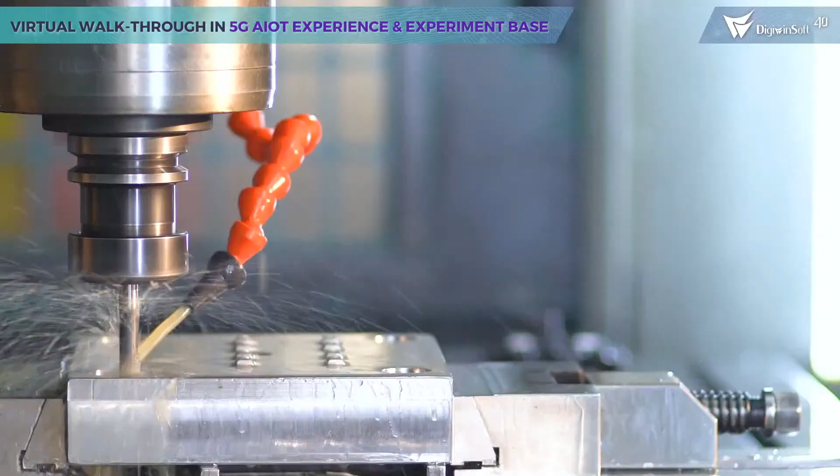The manufacturing process is long. Orders, materials, production, inventory to shipment—each stage is crucial and cannot be ignored. As a business owner, IT software can help you collect data in real time and accelerate the decision-making process.

However, we are facing a problem of being short-handed worldwide. Meanwhile, operation technology, OT, can help you with daily routine tasks to make good use of human resources. The staff can then spend their time on more complex work.

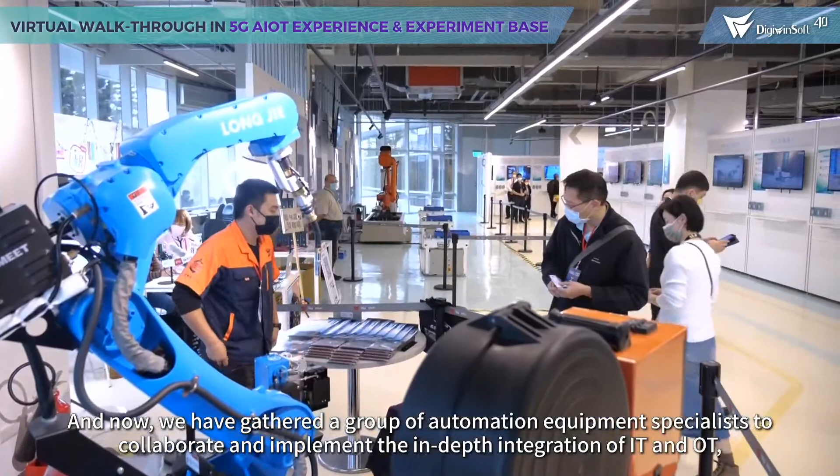Digiwin Software has extensive experience in manufacturing software for various industries, and now we have gathered a group of automation equipment specialists to collaborate and implement in-depth integration of IT and OT, and gradually achieve intellectualization.

The 4 key points to smart manufacturing are high on-site visibility, resilient scheduling, good OEE score, and effective logistics management. Meanwhile, IT plus OT can help you with all the above.

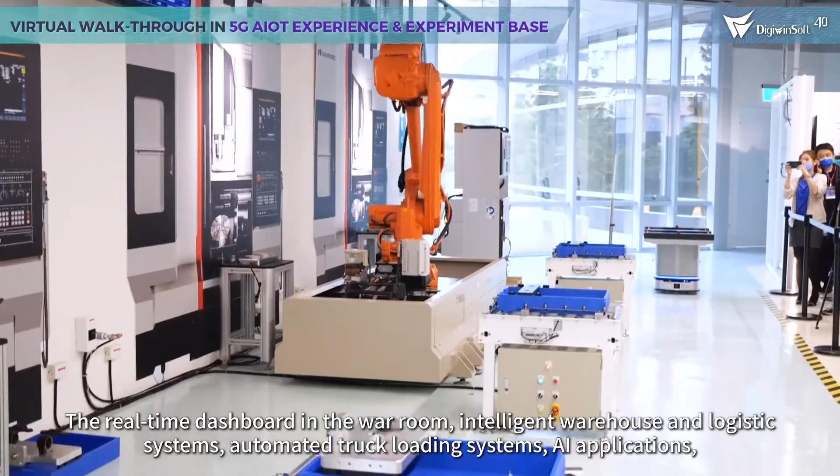Seeing is believing. The establishment of our 5G AIoT EEB allows manufacturers to witness the operation of automation and other technological equipment on site. The real-time dashboard in a war room, intelligent warehouse logistics system, automated truck loading system, AI applications, and up to 18 solutions for you to explore and experience.

Are you excited to have a look at our EEB? Let's cut to the chase.

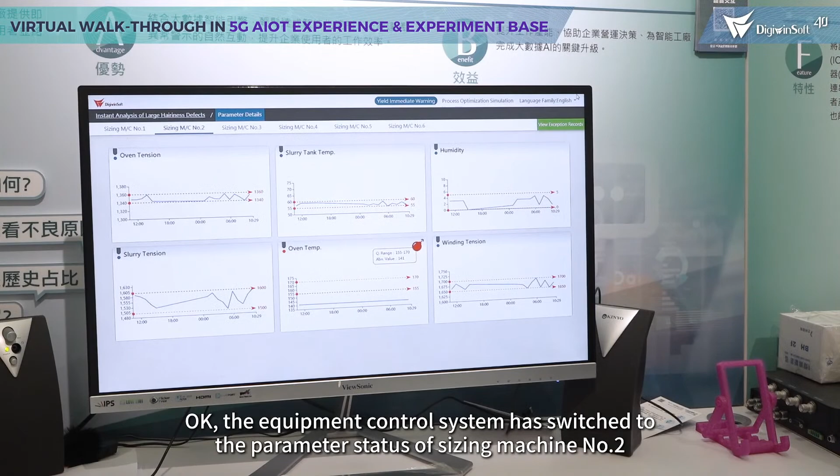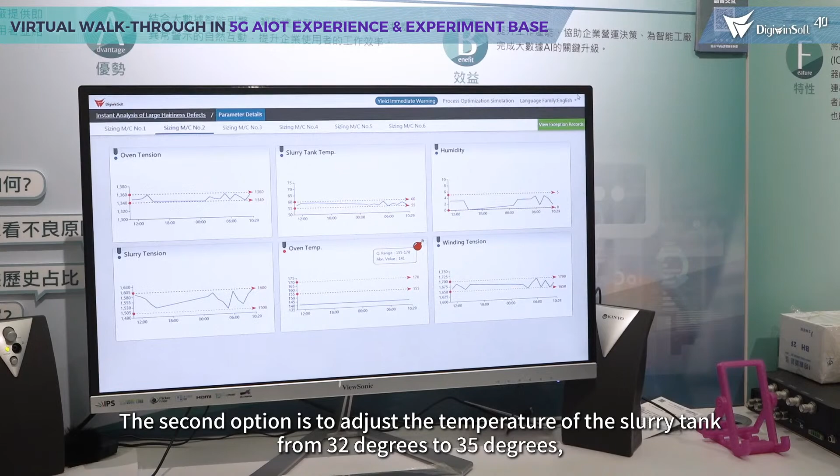Please give me follow-up advice. According to the historical data, 2 options are provided for you to optimize the operation. The first option is to adjust the oven temperature from 158 to 162 degrees. The second option is to adjust the temperature of the slurry tank from 32 to 35 degrees, and the yield rate is expected to improve.

Return to the main page. It has switched to the main page. Do you need any assistance? No thanks.

Wow, that's really convenient. It's just like an upgraded Siri specified for manufacturers. However, what if the digital employee just told me about an abnormal production? Can I request repair work remotely?

Sure, let me introduce another intelligent tool. I will show you the scene where a person needs assistance on the production side. He or she will get remote assistance through the AR HoloLens. For instance, in cases such as equipment failure or abnormal production, personnel cannot perform maintenance and repair through existing production site information alone. In that moment, it is necessary to ask the original factory or headquarters personnel for assistance.

So when will remote assistance be needed? What's the difference between this and making video calls with our mobile phone?

Okay, we use an AR HoloLens. First of all, a typical case is that the factory may have a dangerous condition, such as a chemical factory, or a site has movement restrictions, like working at height. Engineers cannot come in. Now the maintenance can be operated by AR HoloLens so that the abnormal location can be identified, and it can be repaired with both hands without holding the phone all the time.

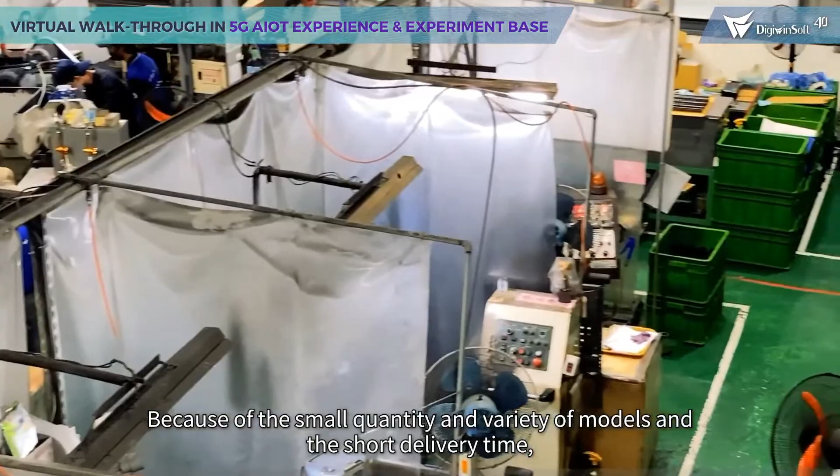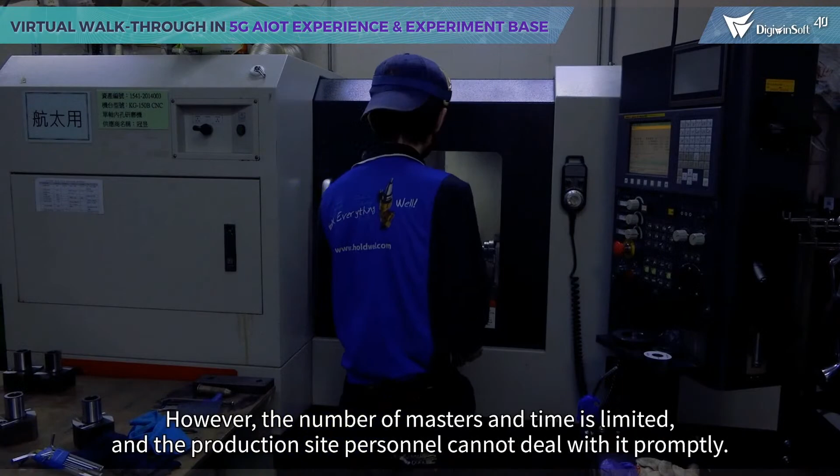Because of the small quantity and variety of models and short delivery time, the frequency of production line changes is quite high. Once the equipment has abnormal problems, it can only be handled by experienced workers. However, the number of masters and time is limited, and the production site personnel cannot deal with it promptly. Hence, there are a lot of inestimable waste costs.

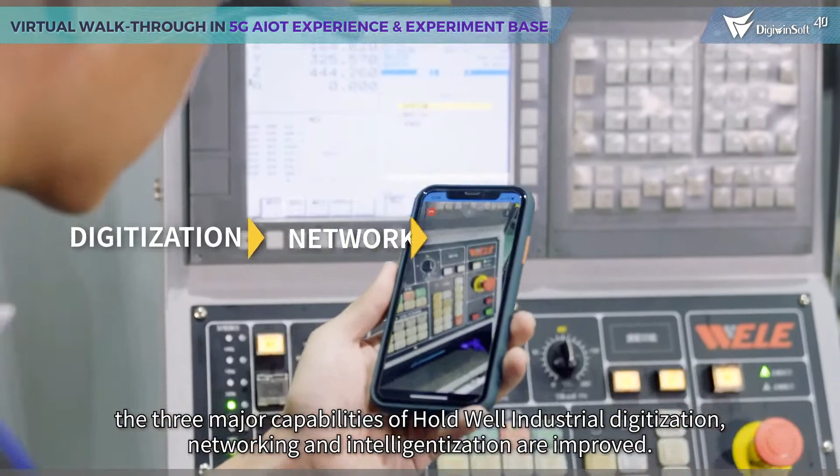Through the in-depth integration of IT plus OT, the three major capabilities of Hold Well Industrial—digitization, networking, and intelligentization—are improved. We can make the distance between the production site and decision-making closer by data-driven management.

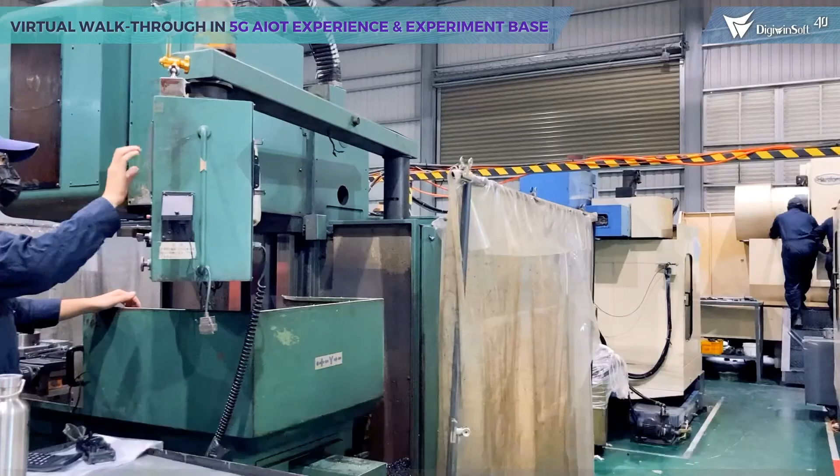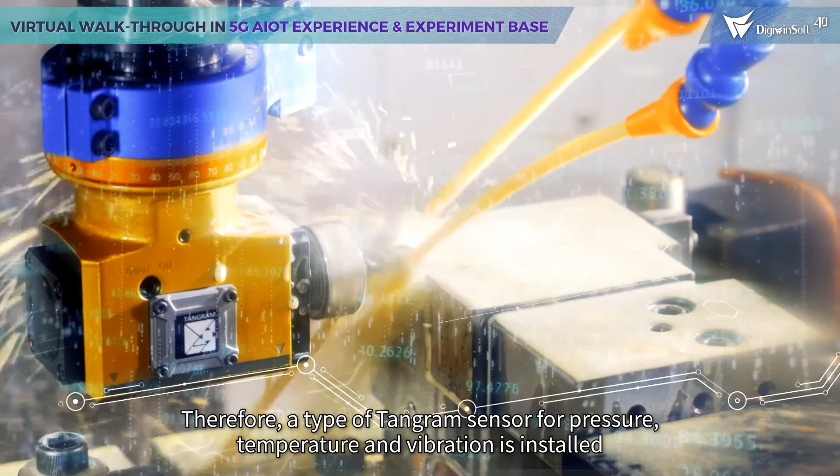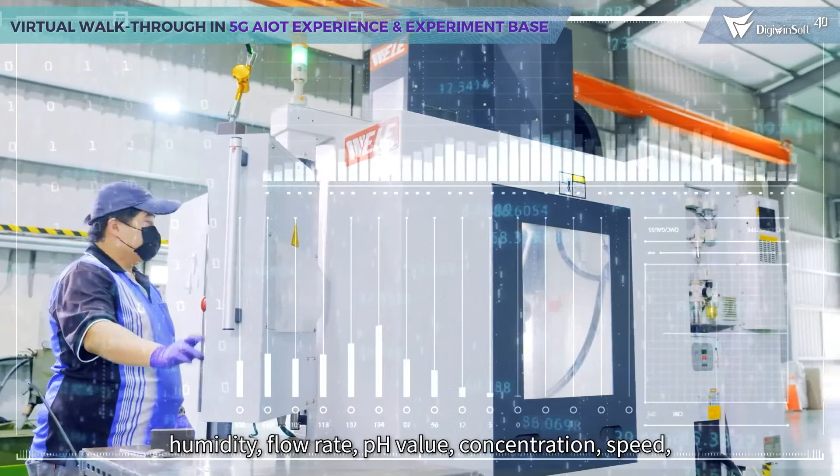At the production site, there are two main factors that affect the machining accuracy: temperature and vibration. Therefore, a type of Tangram sensor for pressure, temperature, and vibration is installed on each machine in Hold Well Industrial production site. Using these sensors to record machine vibration, temperature, humidity, flow rate, pH value, concentration, speed, pressure, liquid level, and other application technology data.

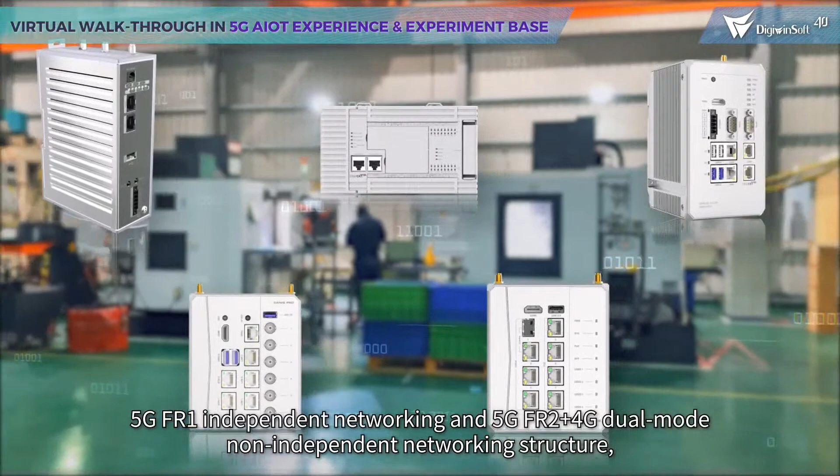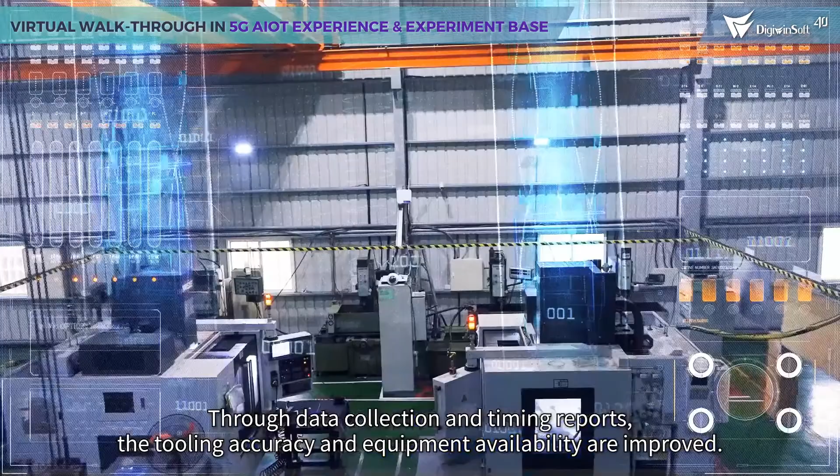Through data collection and timing reports, the tooling accuracy and equipment availability are improved. The health indicators of the machine can be grasped at any time.

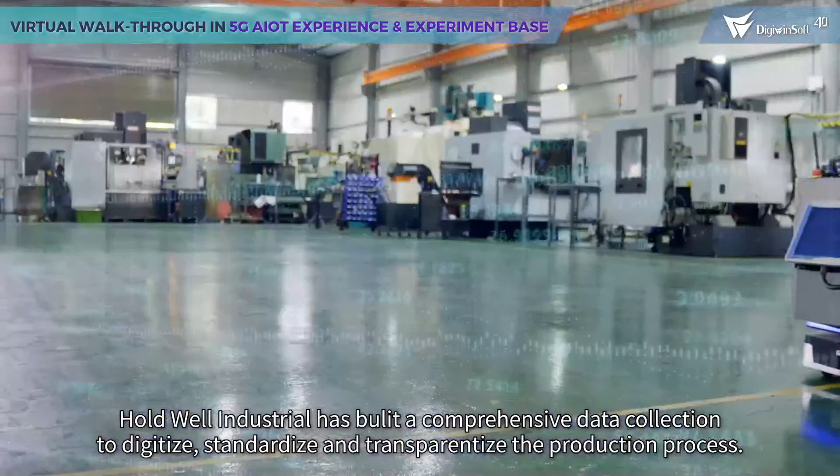Hold Well Industrial has built a comprehensive data collection to digitize, standardize, and transparentize the production process. In addition to reducing the tasks of people operating the machine, it can also make the production site status completely visible so that the decision-making is valid.

After collecting the data, the next step is to think about how to integrate this data into management through the network cloud to enhance the company's intelligent manufacturing capability.

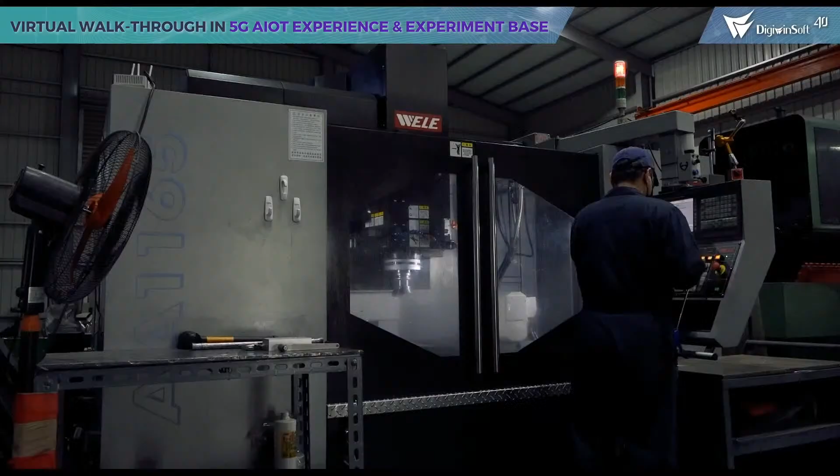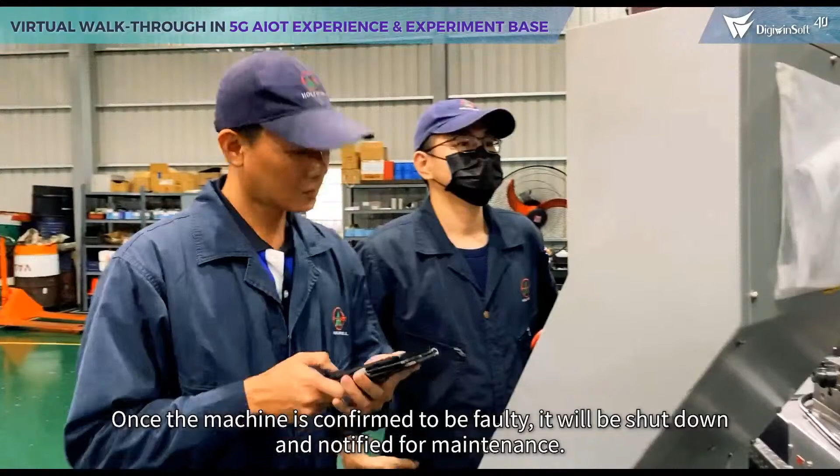When the equipment issues an abnormal alarm, the system will immediately notify the production supervisor. They can find out the problem and perform troubleshooting on the machines. Once the machine is confirmed to be faulty, it will be shut down and notified for maintenance.

The production manager must check the capacity of other machines in advance and reassign the work orders of the failed machines to the other machines to ensure that the production tasks of the day can be completed.

If the machine is overloaded during the day due to the adjustment of production tasks, the production manager will reschedule tasks to prevent the equipment from affecting the order delivery due to unexpected conditions.

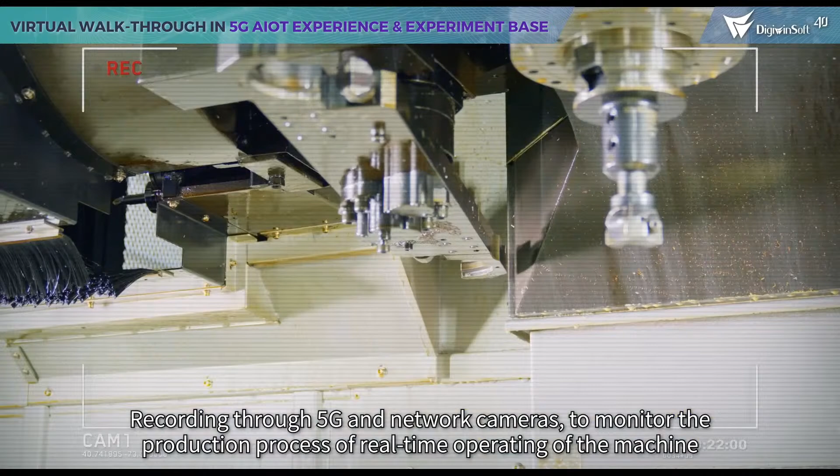Recording through 5G and network cameras to monitor the production process of real-time operating of the machine, and perform image backtracking of the production process when there is an abnormality in the production materials.

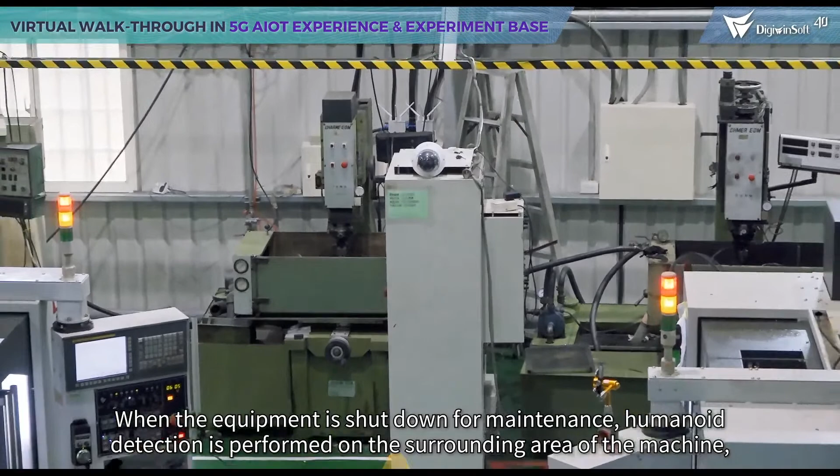When the equipment is shut down for maintenance, humanoid detection is performed on the surrounding area of the machine to prevent workers from entering dangerous areas.

Applying face recognition and real-time body temperature measurement, in addition to recording the entry and exit of production site personnel and body temperature records, the attendance system is also integrated so that the production manager can clearly grasp the status of each production site personnel.

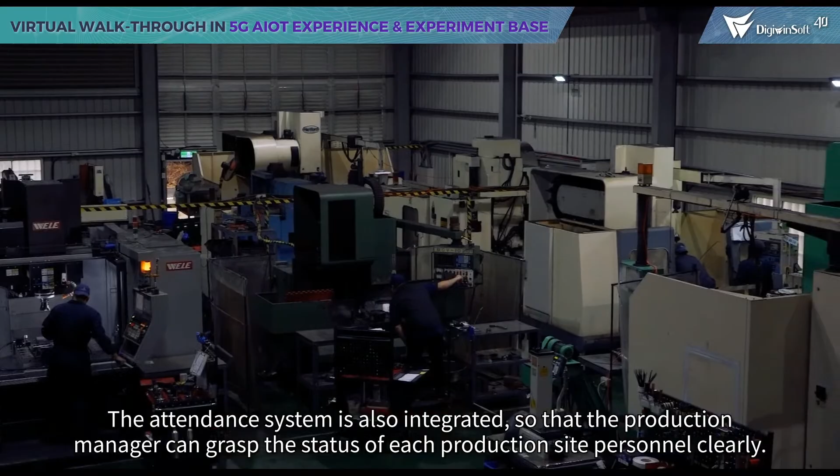Hold Well Industrial built a digital layout of production management through daily operation, production, abnormality, and troubleshooting. IT and OT data have been accumulated and iteratively optimized, becoming the company's exclusive data center.

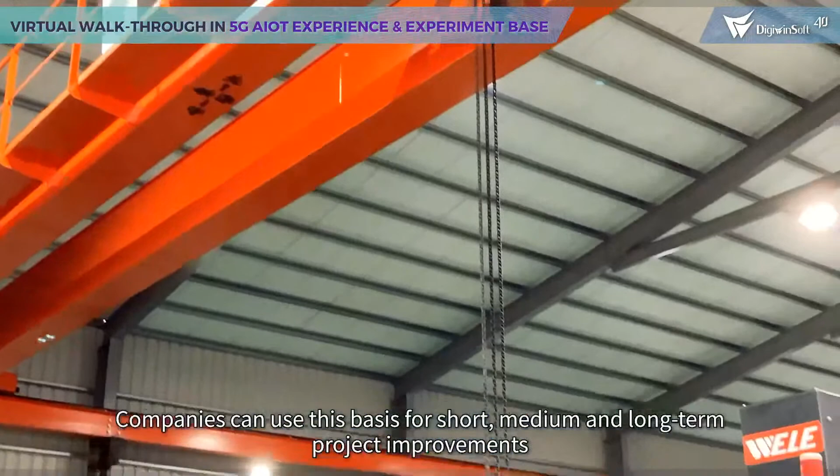Companies can use this basis for short, medium, and long-term project improvements to continuously improve their overall competitiveness. Data application will become the most experienced technician at Hold Well Industrial, from digitization to networking and intelligentization.

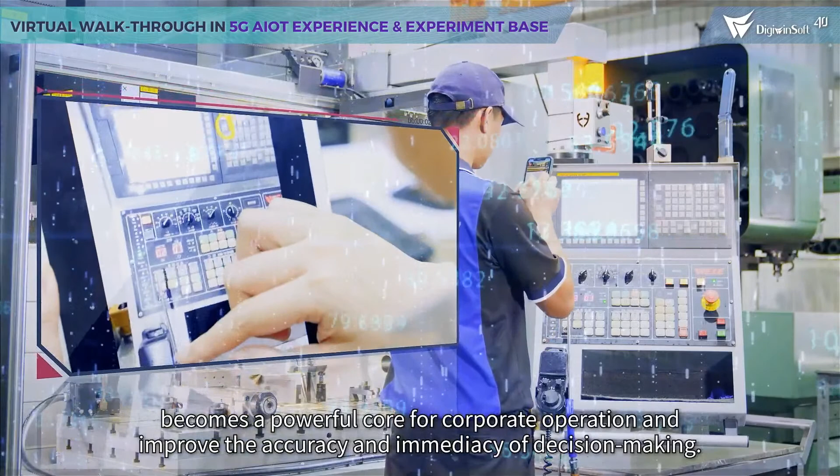The deep integration of industrial software and equipment to build up the intelligent factory with high efficiency and flexibility becomes a powerful core for corporate operation and improves the accuracy and immediacy of decision making.

IT plus OT integration and innovation makes Hold Well Industrial move towards digital transformation. In the next step, Hold Well Industrial will have more opportunities to become a value creator, develop new business models, and achieve the long-term strategy with the goal of sustainable development of the company.

From the video, we can see how Hold Well Industrial has changed from visualization to intelligence. After the intelligentization, we can see that the manufacturing side is controllable and manageable, and it can get three benefits: quality, cost, and delivery date.

In order to improve the management visibility, the production planning and scheduling, the equipment availability, and enhance core production ability. So how do we transfer from visualization to the integration of IT and OT step by step?

The first step is machinery data collection, which is also called IIoT, Industrial Internet of Things. Nowadays, Industry 4.0 has been running for at least 7 or 8 years.

It is not an issue whether the machine can be connected or not. Moreover, the main issue is how do we want to connect and what application of this data should be done. That is the key issue that the enterprise needs to pay attention to.

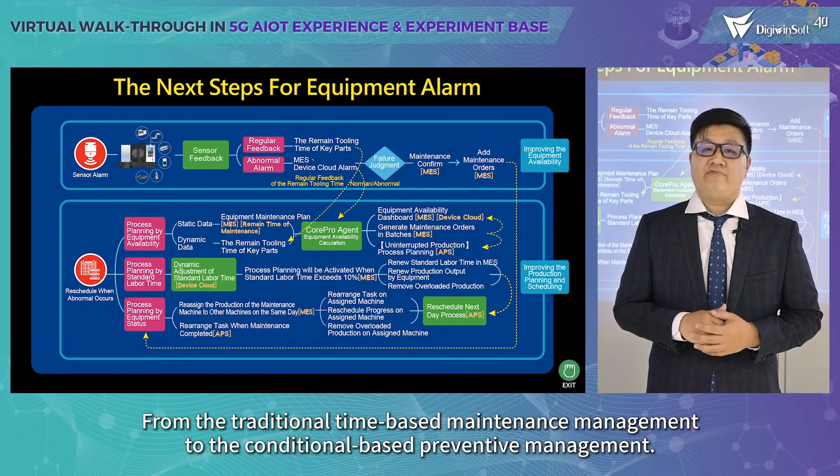Let's take a look at the common scene in the factory. When the equipment alarms, what should we do next? Let's imagine a scene in the machining factory: when the equipment alarms, abnormal notification and data collection will be performed, and maintenance begins.

The previous factory will stop at this step. However, we can do data analysis in the next step, carried out from two perspectives: first, a timing report of the remaining machining time of the key workpiece; second, abnormal data collection.

The equipment capacity and state information are sent back to the MES and device cloud management center. The equipment availability rate, based on real-time production site information, drives the best equipment maintenance schedule and the best process planning without interruption of production, and generates batches of maintenance orders at the same time.

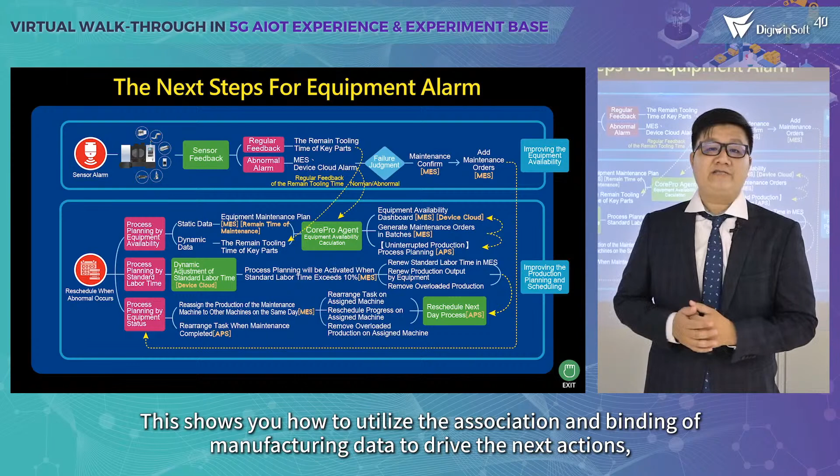That requires personnel to carry out maintenance and reporting. This shows how to utilize the association and binding of manufacturing data to drive the next actions, instead of only driving events such as maintenance with equipment alone.

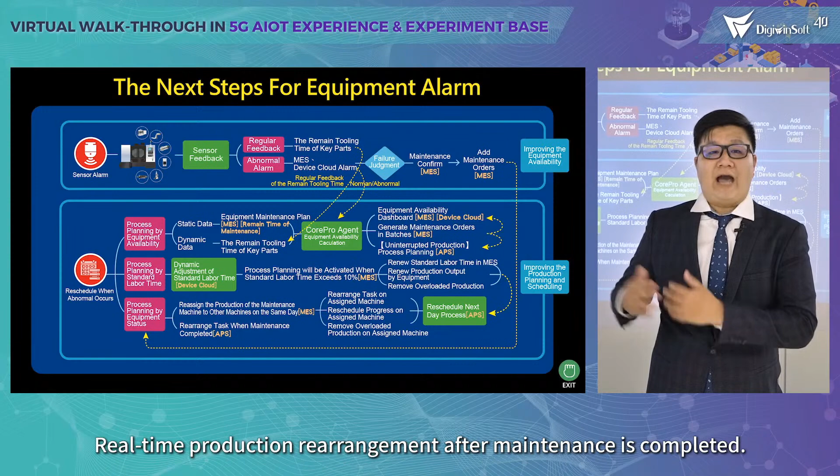Furthermore, we can do production adjustment through data association, production rearrangement with machine maintenance, and real-time production rearrangement after maintenance is complete. At the same time, we can update the standard labor time and production progress of the machine on that day, and remove the overloaded process task to rearrange the progress of the next day.

The above introduction shows the roadmap the enterprise should follow for the intelligent factory and what benefits will be obtained after implementation.

Next, I will introduce you to the theme of the exhibition area. In addition to the roadmap of the intelligent factory, our exhibition areas include combat information centers, or so-called war rooms, intelligent storage and transportation, and automation line central. Next, I will mainly explain the above three exhibition areas.

It's great to learn from successful companies to reflect on what we can do next. So I've seen the production dashboard constantly updating the numbers and data. I bet this is the simulation of the war room, right? If I were a business owner, I would like to monitor the production site anytime, anywhere. The staff might report concerns and conditions weekly or monthly, but the data is not on time and the problem might worsen.

So what can we do with visualization? I shall leave the time to you, Chewy. Actually, the data planning design of the digital dashboard needs to be thought about. The dashboard is not just for looking fancy - more important is what information we can get from this dashboard to help us make decisions.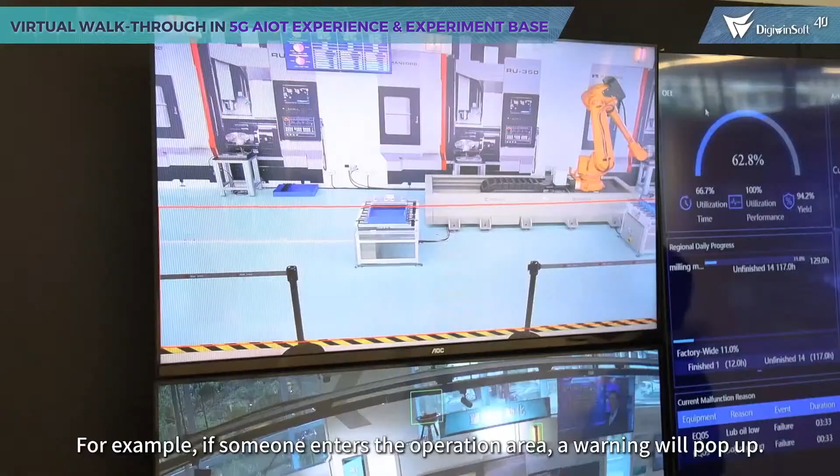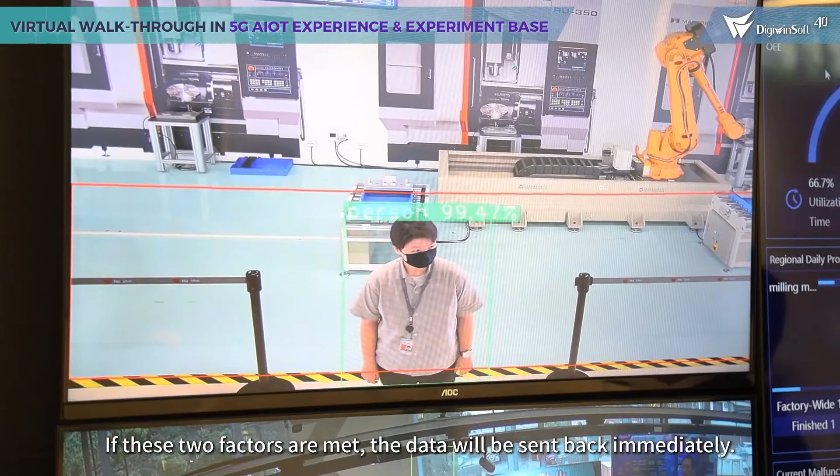For example, if someone enters the operation area, a warning will pop out. Two judgment factors are used to determine whether it is a person or not, and whether they enter the forbidden area. If these two factors are met, the data will be sent back immediately.

The system will perform the next process actions, such as issuing a sound warning or shutting down the equipment or the robot in time. Thanks, Chewy, for the detailed information.

And here comes my favorite part, moving robots. Let's move to the area. Please forgive my foolishness, but this is indeed the most remarkable help for manufacturers in logistics.

In the machining industry, the goods may be heavy and difficult to move around. With precise information fed to the system, robots can help with the manual work. I shall leave the time to the expert. Here you go, Chewy.

Next, I will show you the IT plus OT scene in the intelligent factory. Under the management of Digiwin MES and intelligent logistics, intelligent machines such as AGVs and robots are driven. There are three scenes including warehousing, logistics, and machining.

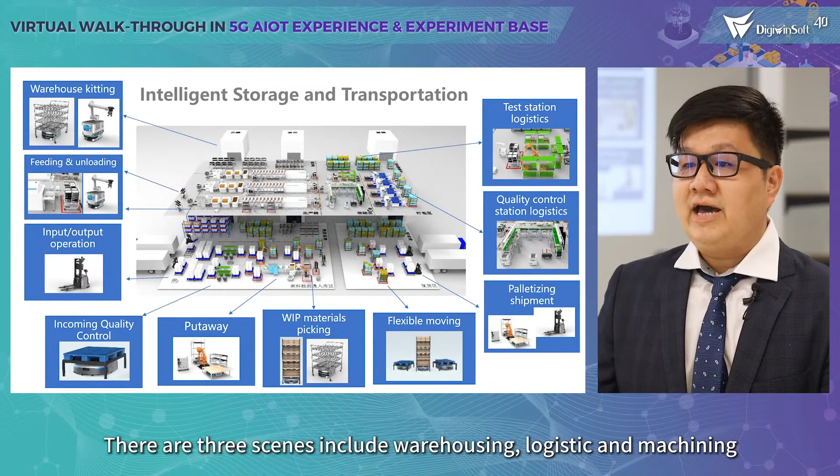First, generally in the machinery industry, the storage side needs to manage incoming and outgoing goods, storage position, and materials return. The material storage type is roughly divided into box storage, pallet storage, and bar storage.

Under the data association of storage location and materials, we can perform warehousing optimization and inventory analysis. Under the integration of intelligent warehousing, intelligent logistics, and AGV, the design of storage space will be more efficient. The warehousing area will be smaller than the previous design, thereby reducing production cost and the cost amortized by warehousing land.

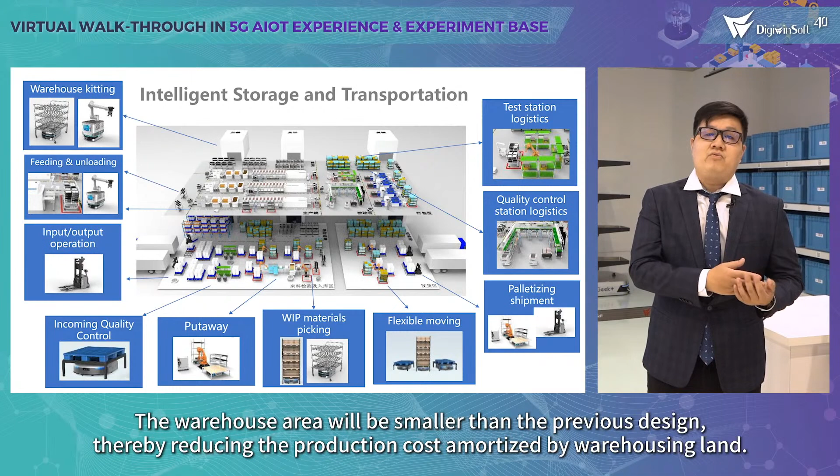After the warehousing and material input, the next part is very important, but this one may easily be overlooked by the factory. This is the waiting time between the release of the work order and the production of the machine.

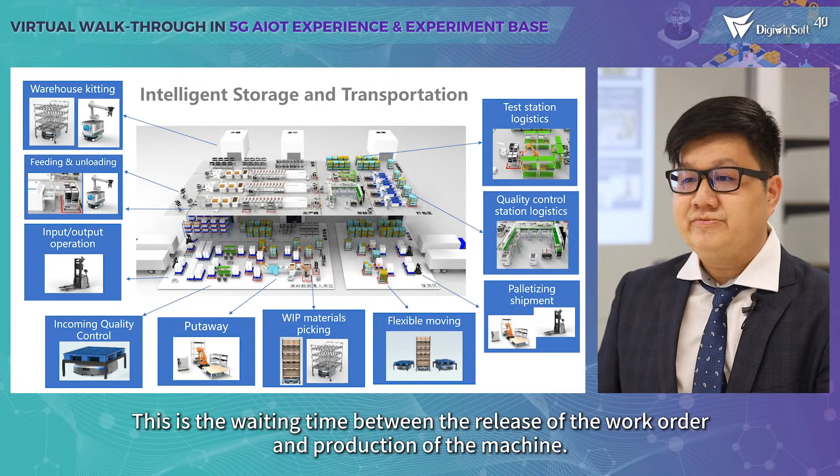This waiting time is an invisible cost and waste for the factory, and also a common production bottleneck in the machinery industry, also known as effective tooling time. The effective tooling time of a 24-hour factory is about 4 to 16 hours. The company does not know why the effective tooling time cannot be increased, and the reason for the suspension.

Under the implementation of Digiwin intelligent logistics, the information flow between the warehouse and the production side is linked and associated. When a work order is issued, the intelligent logistics immediately correspond to the material and its storage location. The AGV starts the material picking task via the RMS, the robot moving system. The RMS performs optimal planning based on the path from the storage location to the production site, shortening the time from work order issue to material arrival. Hence, the logistics data of the factory is visualized.

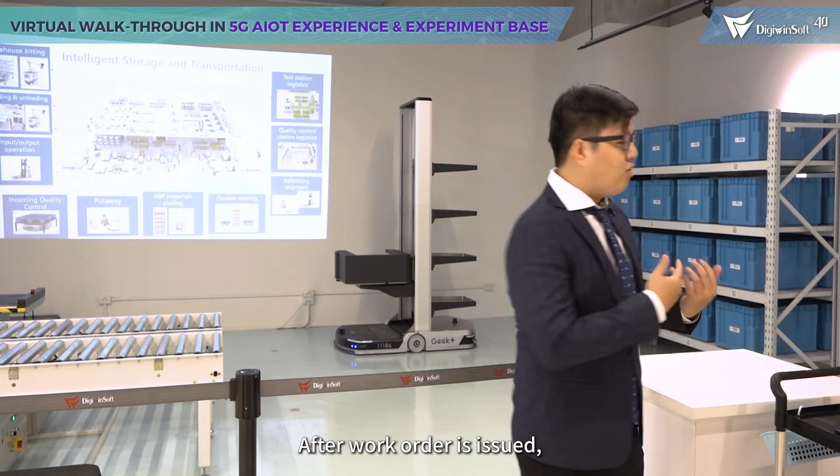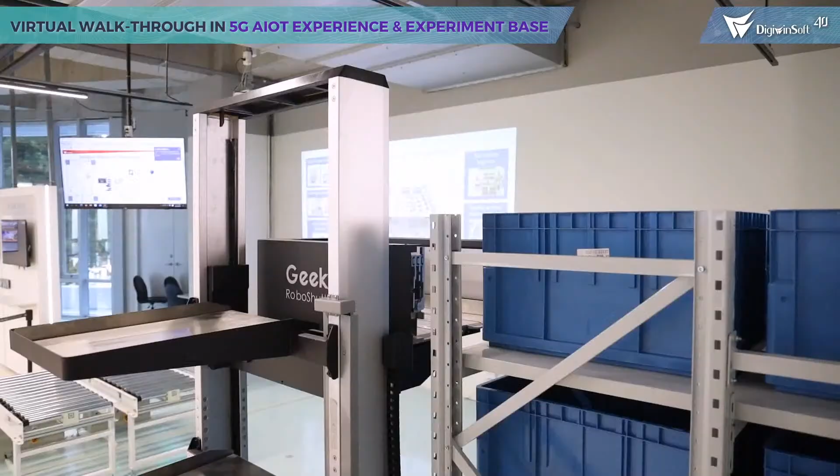Now please look at this operation. After the work order is issued, the ERP will send a transportation task to the RMS, and the AGV starts picking materials. The logistics between the material outbound from this warehouse and the inbound to the production site is carried out perfectly, and unmanned storage and transportation is realized.

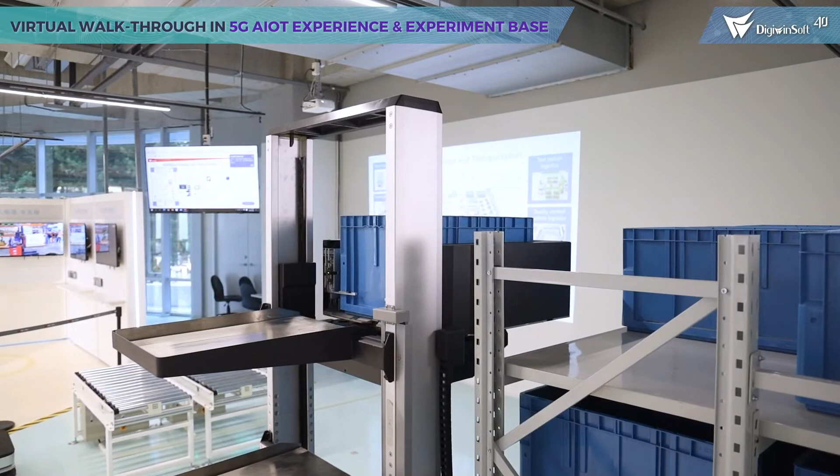Okay, we take out this workpiece. The AGV will return to the warehouse. Automation brings convenience to the manufacturing industry.

Besides humanless storage and transportation, I saw a giant robot arm over there. Shall we take a look? Sure. Wow.

You might wonder if we can accomplish a full production line with automation. Yes, we can. Chewy, can you please let us know how this works?

Now we are in the machining side, the processing scene of the CNC milling machine. After the AGV finished transportation, the workpiece combined with the quick mold changing system. The robot automatically loads the workpiece and starts tooling.

With the implementation of the intelligent manufacturing system, we can achieve the goal of a fully automated production line with the combination of IT and OT, thereby reducing manpower and the technical threshold. Next, let me show you the scene of the automation line. Let's look at this one.

The dashboard is applied for this automation line. When we start tooling, the system will collect real-time production data during the operation, including tooling time, waiting time of transport, and waiting time of loader and unloader. More importantly, it's able to monitor the effective operation of equipment with the OEE.

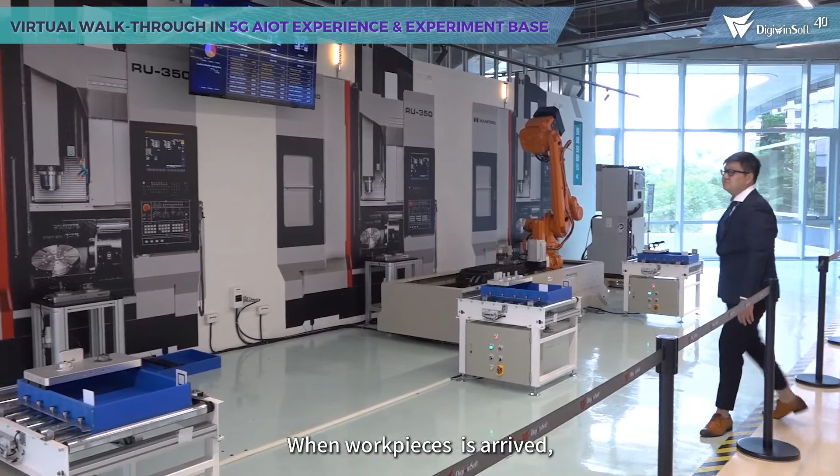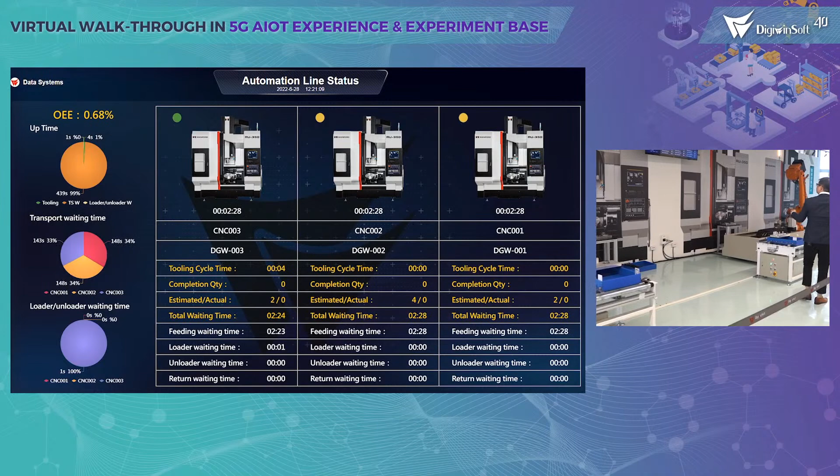Please follow me. When the workpiece arrives, the tooling task is triggered, and the system immediately enforces the robot to carry out a feeding operation.

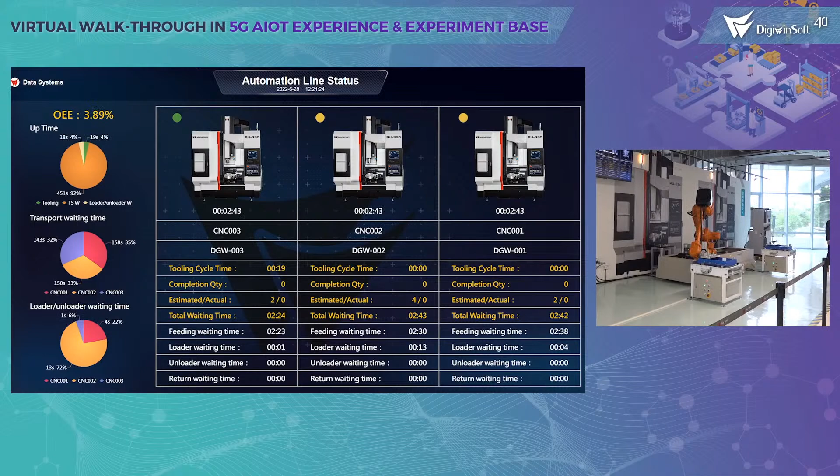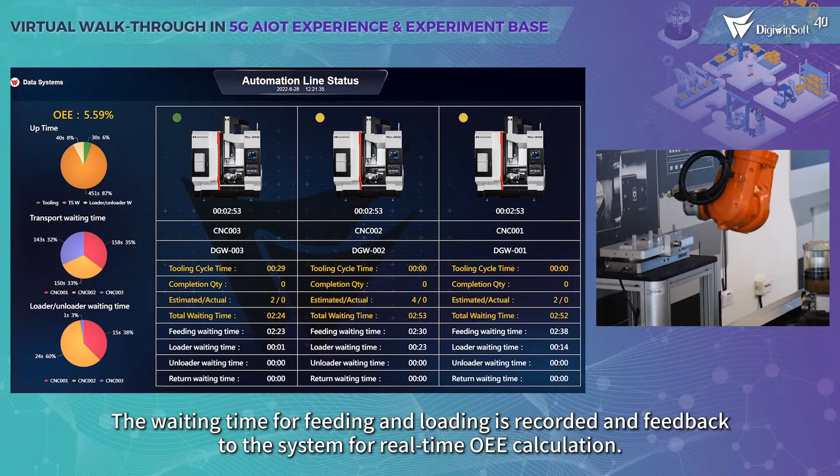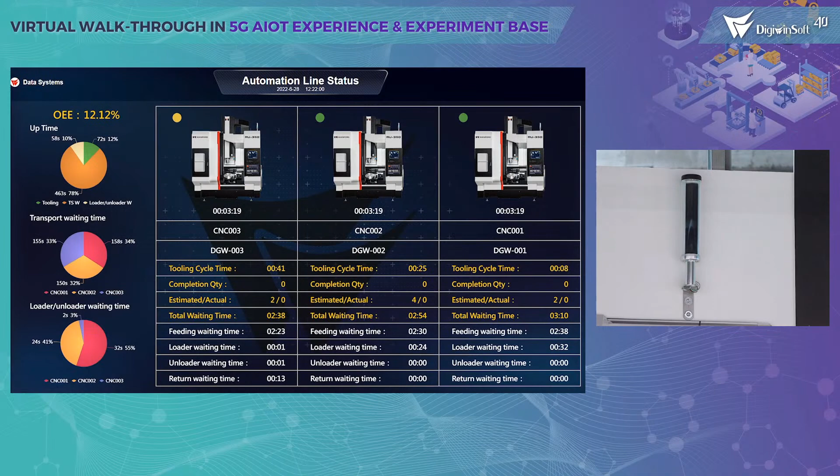The waiting time for feeding and loading is recorded and fed back to the system for real-time OEE calculation, and you will see the dynamic OEE shown on the dashboard. After the tooling is complete, the system records the overall processing cycle, the time of workpiece unloading and returning.

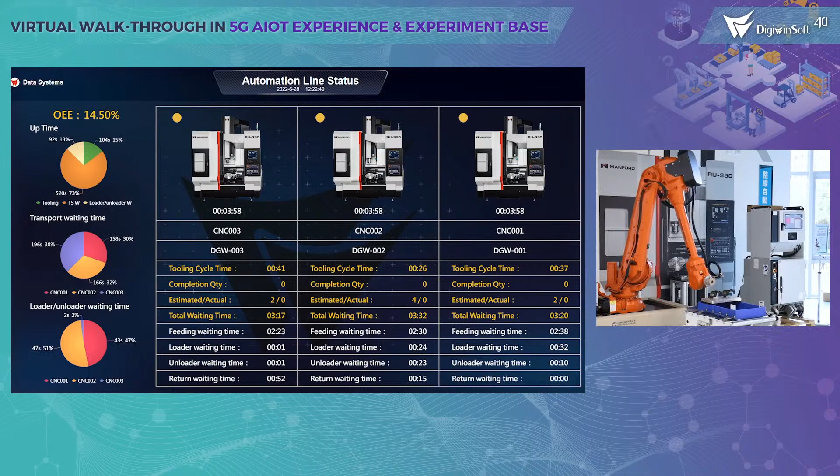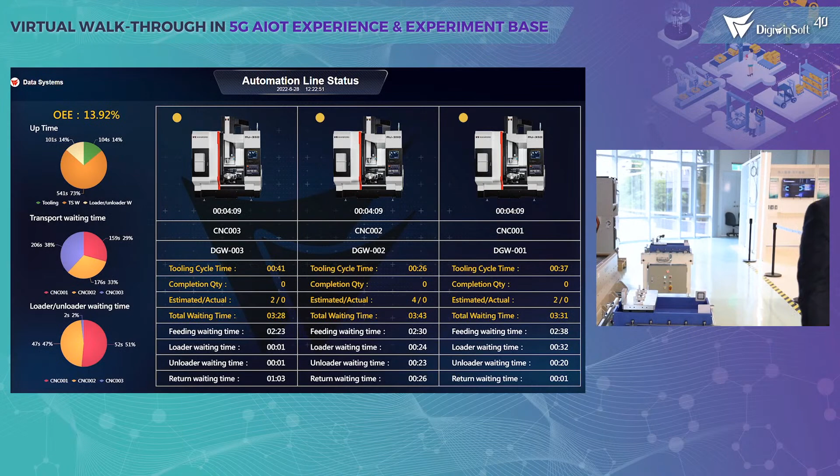This is the theme of the digital factory with visualized production data. That is why the physical factory becomes the virtual digital model. The flow of the physical process will be reflected in the digital factory. Domain knowledge will be integrated into applications such as predictive diagnosis, resulting in production improvement and product lifecycle management, etc. This is the term you may hear in the field of intelligent manufacturing, the digital twin.